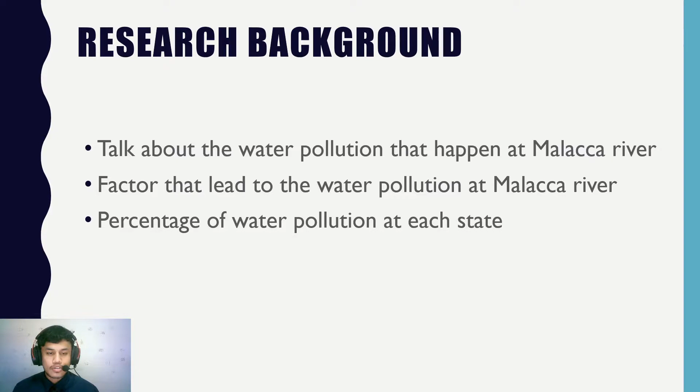For the problem statement, there are several problems we identified during the research: how to reduce the trash at Malacca River effectively, how to change the attitude and give awareness to the community about water pollution, and lastly, how to change the traditional method to a new modern trash collector.

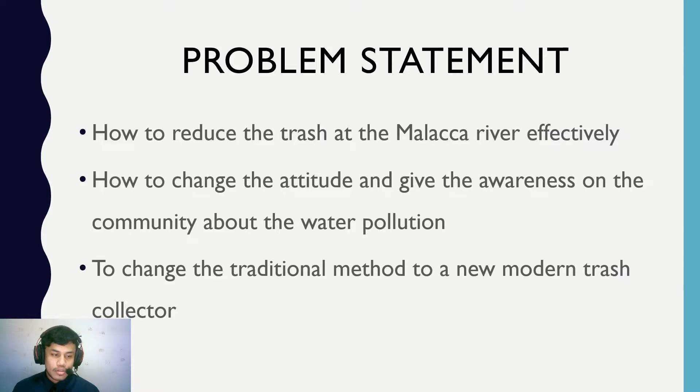For the research objectives: first, to design and improve the existing water barrier; second, to analyze and optimize the new design of water barrier using solidThinking software; and lastly, to focus on an effective method to collect trash at Malacca River.

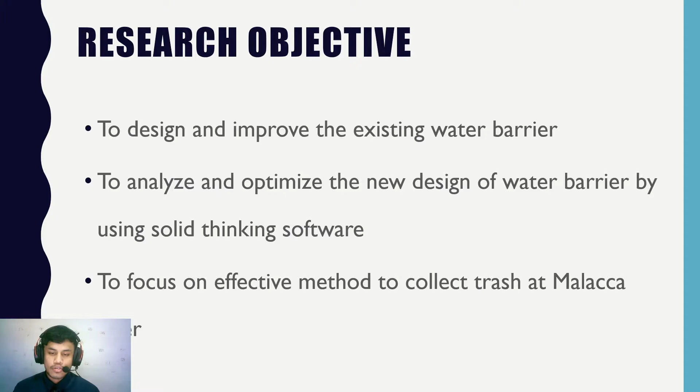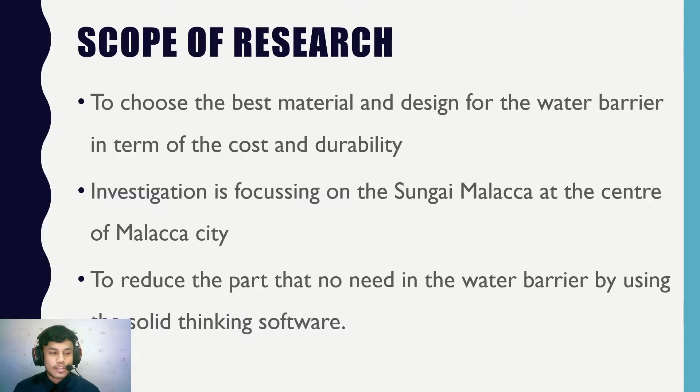For the scope of research: first, to choose the best material and design for the water barrier in terms of cost and durability; second, the investigation is focused on Sungai Malacca at the center of Malacca City; and lastly, to reduce unnecessary parts in the water barrier using solidThinking software.

For the significance of research: first, to create a water barrier concept to reduce trash at Malacca River; second, to improve the existing water barrier concept by adding green technology characteristics; and lastly, to reduce human energy by designing an automatic water barrier.

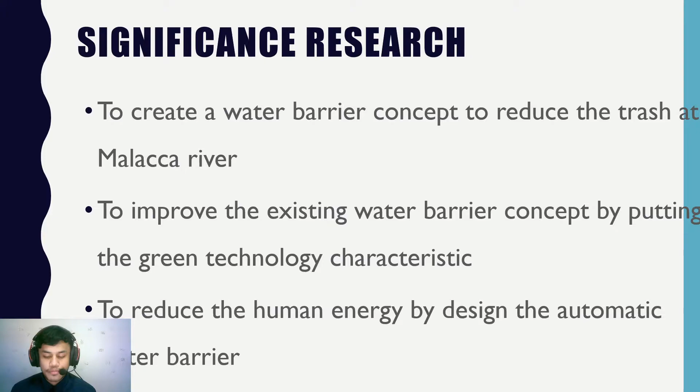For the expected results: first, to create the best design of water barrier concept; second, to choose the best material and components to be used in the water barrier; and lastly, to replace the traditional method of collecting trash with an automatic system.

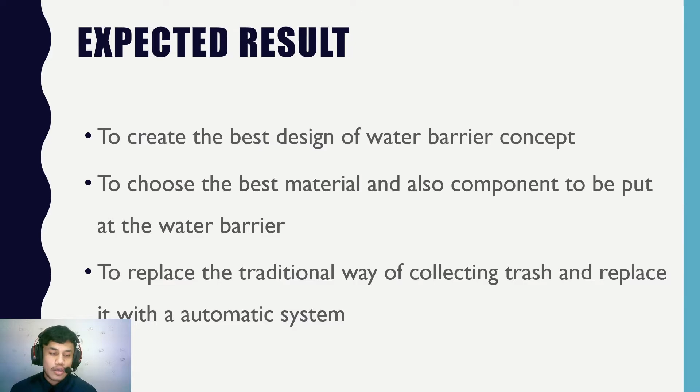Next is chapter 2, literature review. For water pollution, there are several related articles. The first is from Mr. Chan, which mostly discusses water quality in our country, explains the types of pollutants released on the water surface, and lastly, the effects of river contamination if it continues.

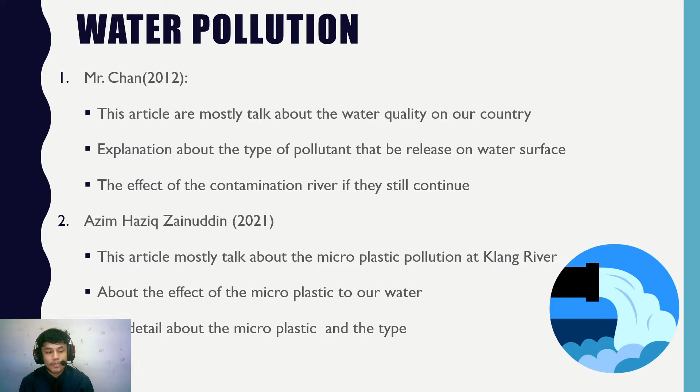The second article, from Azim Haziq, mostly discusses microplastic pollution at Klang River, the effects of microplastics on our water ecosystem, and details about microplastics and their types.

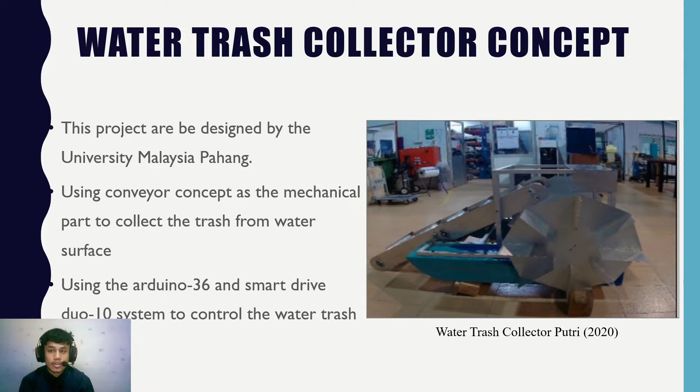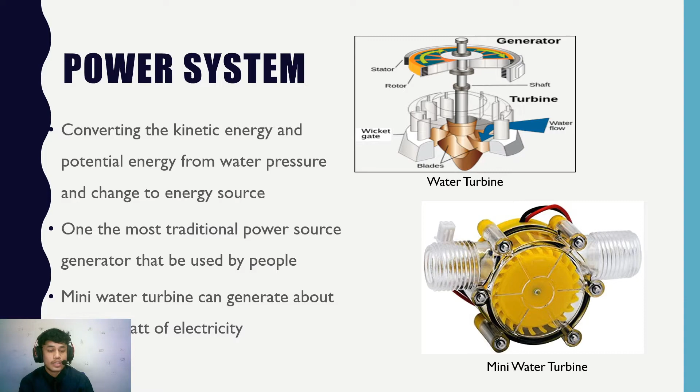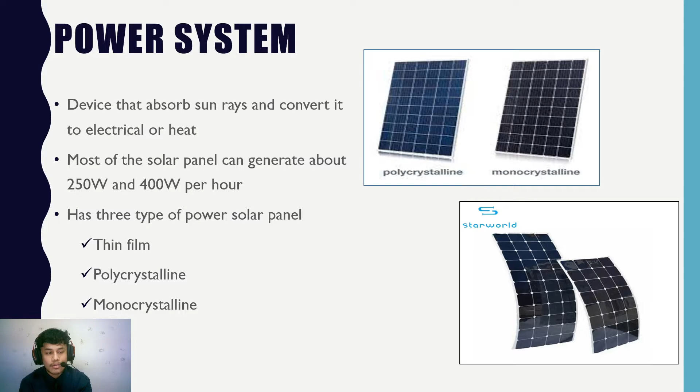The next power system is solar panel. As we know, solar panels absorb sun rays and convert them into electric or heat energy. Most industrial solar panels can generate about 250 to 400 watts per hour. There are three types of solar panels: thin film, polycrystalline, and monocrystalline.

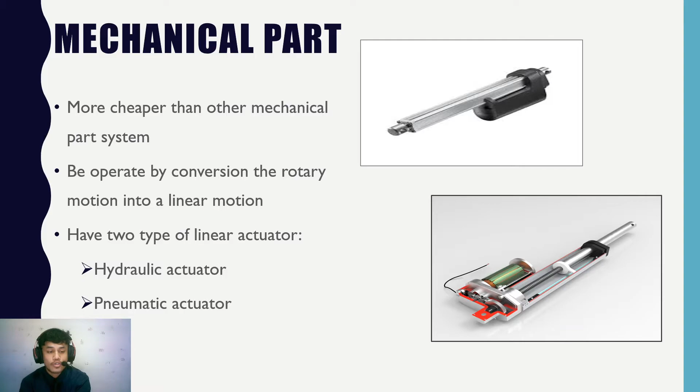For the mechanical part of the water barrier gate, we are using a linear actuator because it is cheaper than other mechanical systems. A linear actuator operates by converting rotary motion into linear motion, and there are two types: hydraulic actuator, which uses fluid, and pneumatic actuator, which uses an air compressor.

For the next chapter, research methodology: the software we use for our water barrier is 3D SolidWorks.

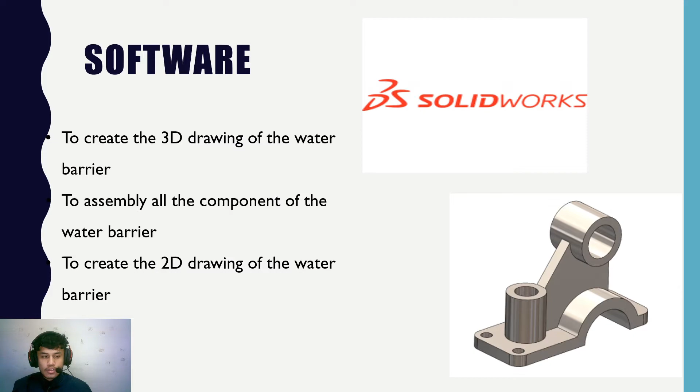SolidWorks is used to create the 3D drawing of our water barrier, then to assemble all the components, and lastly to create the 2D drawing of the water barrier. For the next software, that is Solid Thinking.

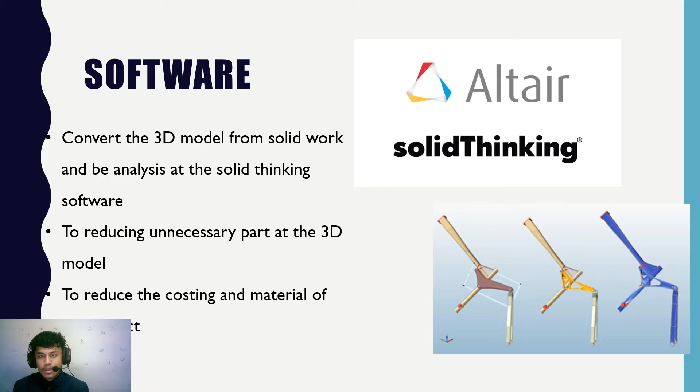The software is used to convert the 3D model from SolidWorks and analyze it in Solid Thinking, then to reduce unnecessary parts of the 3D model, and lastly to reduce the costing and material of this project.

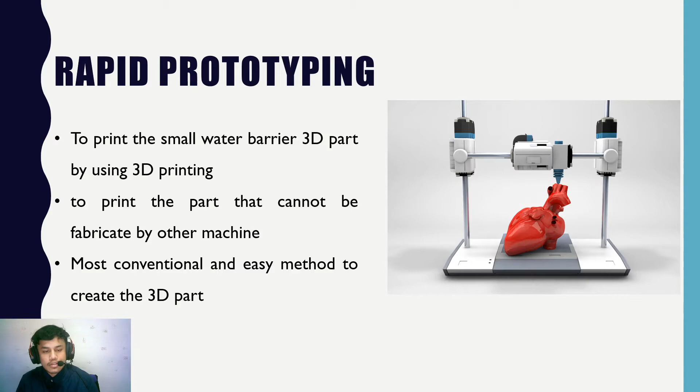For our rapid prototyping of the water barrier, we are using 3D printing. This is because by using 3D printing we can print small parts of our water barrier. Besides that, we can print parts that cannot be fabricated by other machines, and lastly, 3D printing is an easy method to create 3D parts.

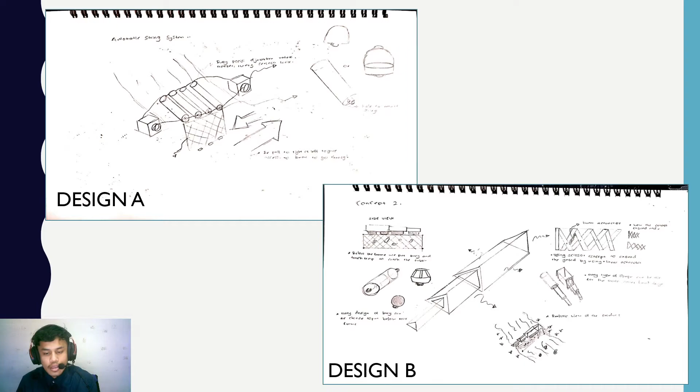Next is our product design specification. For this semester, PSM1, we are using our product design specification as our preliminary result. There are several designs we have created for our water barrier: design A, design B, design C, design D, and design E.

For specification, design A uses a wire belt, cylinder motor, and DC power supply. Design B uses a linear actuator, solar panel, and battery. Design C uses a power pump, power supply source, and buoy. Design D uses a linear actuator, power supply, and trash wire trap. Design E uses a pneumatic motor, power source, and trash wire trap.

The function of design A is that the gate is controlled by 2 rotary wire wheels to pull the trash trap front and back. For design B, the gate expands until it fully covers across the river and returns to the original position when a boat wants to cross. For design C, the gate sinks when a boat wants to cross by using the pump.

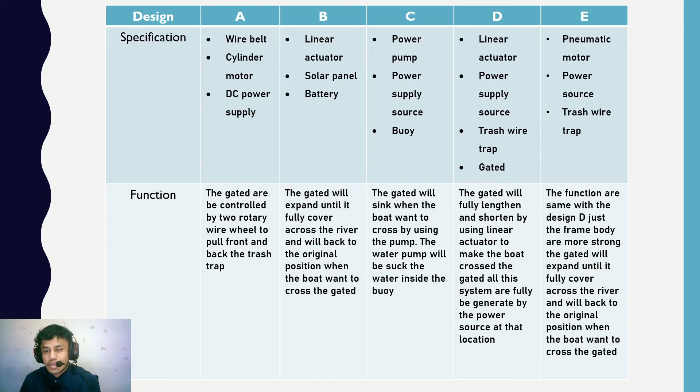The water pump sucks the water inside the buoy. For design D, the gate fully lengthens and shortens using a linear actuator to let the boat cross the gate. For design E, the function is the same as design D, just the frame body is stronger than the other designs.

For the advantages: design A is a simple design concept and easy to fabricate. Design B's battery can store energy power from the solar panel. Design C's buoy fully submerges via the pump and sinks better than other designs. Design D is stronger than other designs because the frame is split in half. Design E has a more strong structure and body than other designs.

For the disadvantages: design A's trap cannot be sunk fully by the system. Design B's solar panel will not be fully utilized on rainy days. Design C needs a detailed design on the buoy to ensure the system functions fully. Design D needs a stronger structure at the frame. Design E also needs a detailed design on the buoy to ensure the system functions fully.

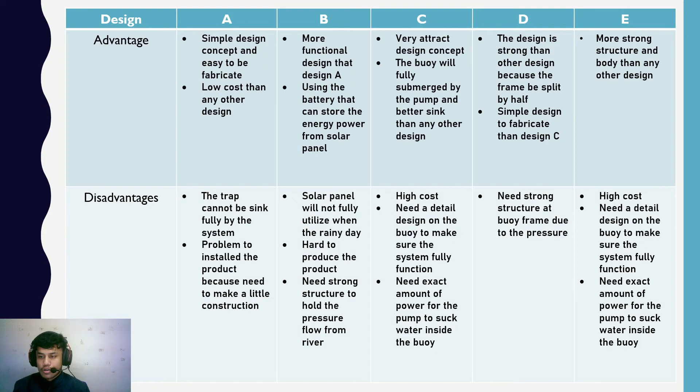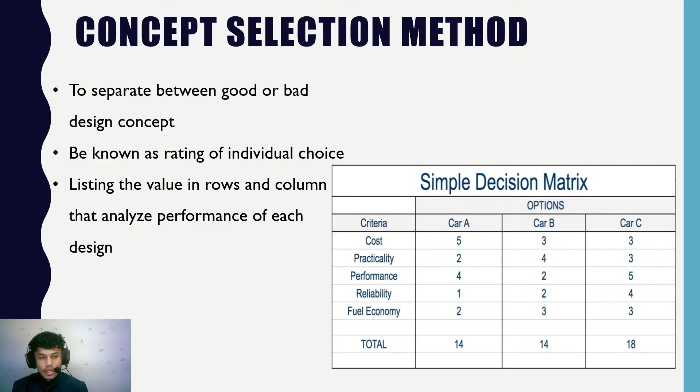For the concept selection method, as shown on the right side, this is a simple decision matrix. This concept selection method separates good or bad design concepts, rates individual choices, and lastly lists values in rows and columns to analyze the performance of each design.

The second method is the concept screening matrix and concept scoring. The concept screening matrix is less detailed scoring of designs and models based on certain criteria. Concept scoring is used after the best design is chosen from concept screening, and lastly, all criteria in concept scoring are given weight based on importance.

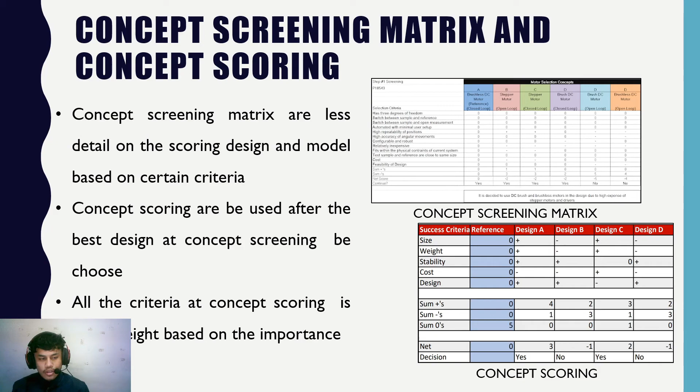For our flowchart, there are several steps to do a design. First, brainstorming for all possible concepts from the problem statement. Next, mind mapping to narrow down the concept of our water barrier. Then design sketching from the mind mapping, followed by concept selection and scoring, and lastly the final design concept.

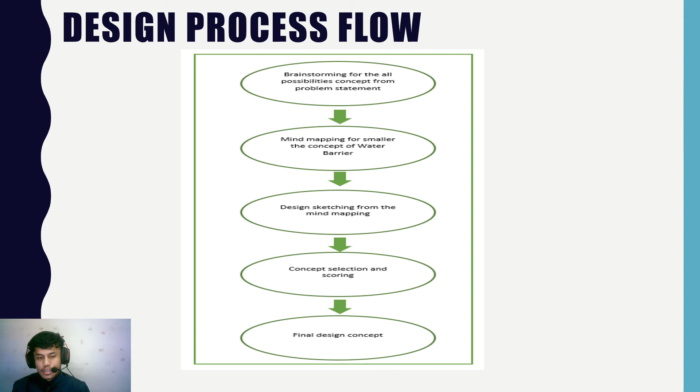For our conclusion for this project, Sarjana Muda 1, we are focusing on research and methods that can be used to design and produce the finished design of the water barrier. Next, to create several designs that can be chosen for PSM2, and lastly, to understand more of each possible component and method to use for PSM2.